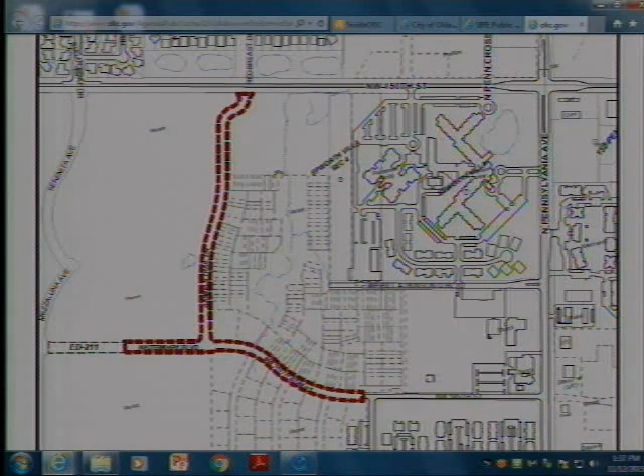Chair would entertain a motion. Move approval. Got a motion and a second to approve item number 5. All those in favor? Thank you. Record show all voted aye.

Item 6 was deferred. Item 7 is SPUD 851, to rezone 4401 Southeast 118th Street from C3 and AA to SPUD 851.

Yes, sir. State your name and address, please. Kerry Vogt, my address is 2509 Southeast 93rd Street, Oklahoma City.

If you remember, at the last Planning Commission meeting, I asked this gentleman to make some attempt to do elevations and so on and so forth. He has sent pictures. I have talked to him two or three times, a couple of times on the telephone. I have no problem with what he's trying to do there, so I'm satisfied with what he's trying to do.

With that, I move approval of that. Is there anybody else who might want to speak on this matter, or anybody wishing to protest?

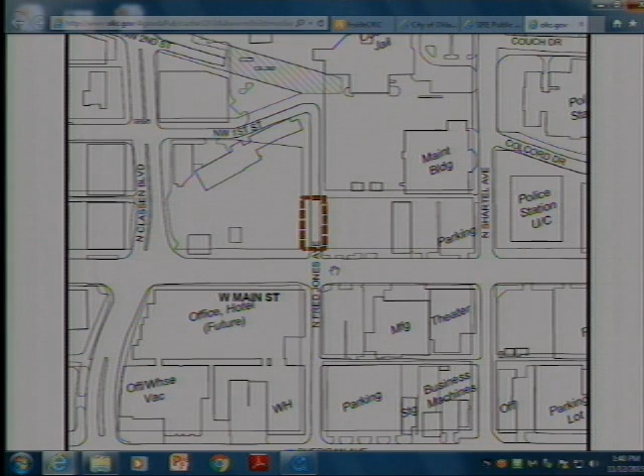Cindy, do you have some of these pictures? I do. Go ahead. I'm sorry, Ms. Powers - is the approval you're asking for subject to approval by the board of that curb cut?

Sure, so it's going to work itself out because we still have to go to council and the Board of Adjustment. The Board of Adjustment will be heard in December for the curb cut.

The only question I have is about conditional approval. If we do, why can't our approval be conditioned upon the Board of Adjustment approving what it is they want to do? You'd have to ask your legal staff - I don't know if you can condition a closing. Dan, can we do a conditional approval?

Sure, that's what I'd prefer, rather than - because if you have every optimistic idea that you're going to get approved, I wouldn't like for us to say yes and then something happens. So I would modify my motion to a conditional approval of this application, conditioned upon the Board of Adjustment approving the application to provide what Young Brothers needs. Fair enough. I'm hopeful that the Board of Adjustment will be very receptive to our application.

I have nobody signed up in protest for that item. Got a motion and a second on item number 8. All voted aye. Thank you.

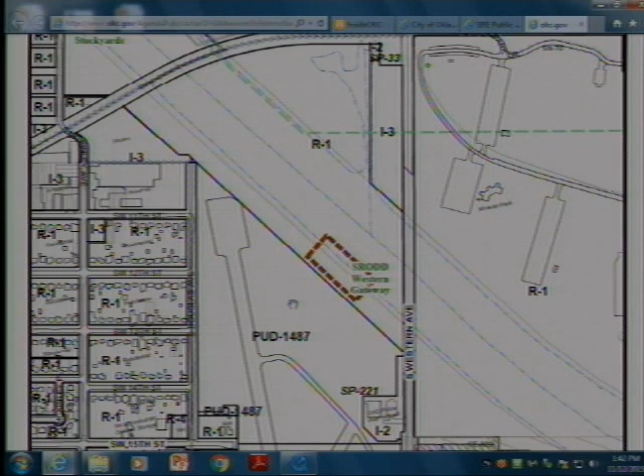We do have a video of a model very similar of what this Ferris wheel will be, and I want the Commission to be able to see the light show that we're discussing. How long is the video? About 35 seconds, like 10 seconds.

I would like Blair to come up and address the commission, just to give them an update on the overall project.

Absolutely, Blair Humphreys, 1222 Northwest 20th. Honored to be before you. I think last time I was here we were providing an update and progress presentation on Wheeler District. We're still actively working away. The Ferris wheel is still the thing first on the drawing board to get developed.

Development is a humbling process, so everything is taking a little longer and costing a little more than I initially anticipated, but we're still very much committed to fulfilling the vision of the Wheeler District Master Plan that was put together by the citizens through our charrette process a little over a year ago. The Ferris wheel will serve as a gateway not just to the project and along the river, but also to the entire Southwestern Avenue corridor and hopefully to the south side, and really become another part of the iconic mix of elements in and around downtown and throughout Oklahoma City.

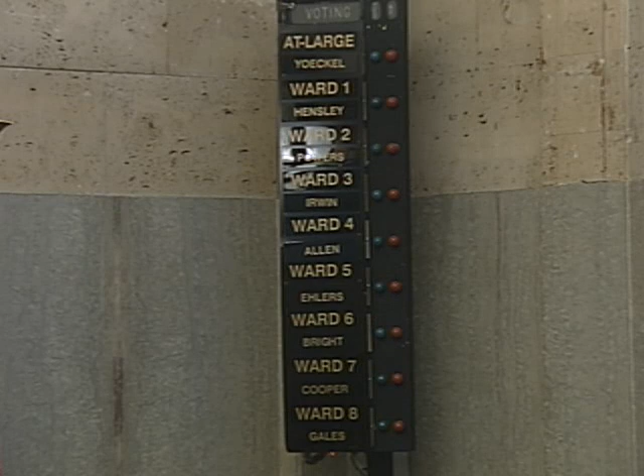With all the conditions cited in the staff report, are you agreeable to all of those? The ones from the Scenic River, we obviously keep the Scenic River designation on. Yes. So my only comment is, as long as the design meets with these conditions, the design elements that are in this had to get specific design approval through the Scenic River Design Commission. So, yes, qualified that as long as what you see is permitted under the SPUD. Okay, so long as we're not agreeing to anything not permitted.

Got a motion and a second, and all voted aye. Thank you.

Got two protests on this one. Item number 10 is SPUD 856 to rezone 7 South Mickey Mantle Drive from BC, DP, and FP to SPUD 856.

For the applicant, can I have your name and address, please? Victor McAllister, B&T Engineering, 2833 Southwest 119th, on behalf of Verizon Wireless.

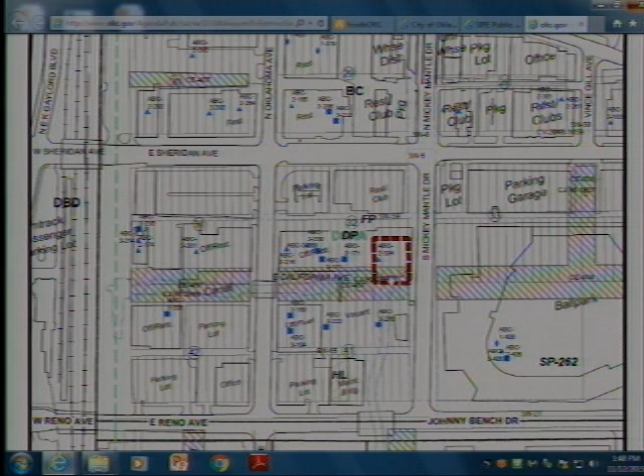Can you give us an idea of what you're doing? Basically, we've been working with staff, and per Planning Commission direction, we went to Bricktown this morning for committee and got approval there. Basically, all we're doing is adding some small 12-inch by 12-inch antennas onto the JDM Place building. There are currently similar antennas already in place, so we're going to paint to match for all direction.

Did the Bricktown Design Review Committee look at this? Yes, they did, and they approved it this morning.

Any other comments or questions from the commissioner? When are we going to know if these things work? This is a different applicant than the previous one that came through for Verizon with a different type of technology. This one is more mainstream wireless. So our intent is to hopefully have this on air in conjunction with the entire network, hopefully by third quarter next year.

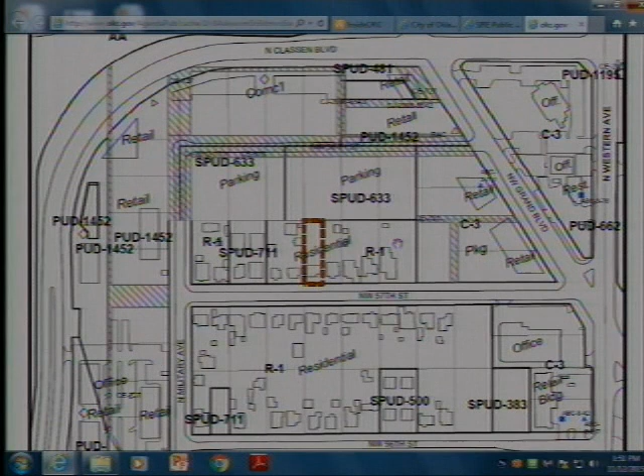The only question I really had about this application had to do with your side yards, your separation. The properties to the west of this all have two-story structures of one kind or another behind the main structure, and it backs up to a parking lot. So I don't have any objections to this.

Is there anybody who wants to be heard on this matter? If not, I'll move for approval. Second.

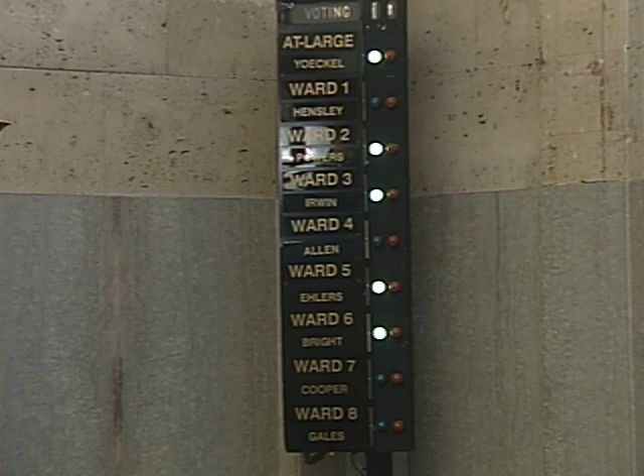Do we have anybody in the audience wishing to speak in protest? I have nobody signed up. Let the record show all voted aye. Thank you.

Item number 12 is SPUD 858, to rezone 15505 North Penn from R1 to SPUD 858.

Hello, my name is Steve Landes with Landron Group, or Landron Engineering, on behalf of the owner and the developer on this project. My address is 209 West 9th, Shawnee, Oklahoma.

Once again, my name is Steve Landes.

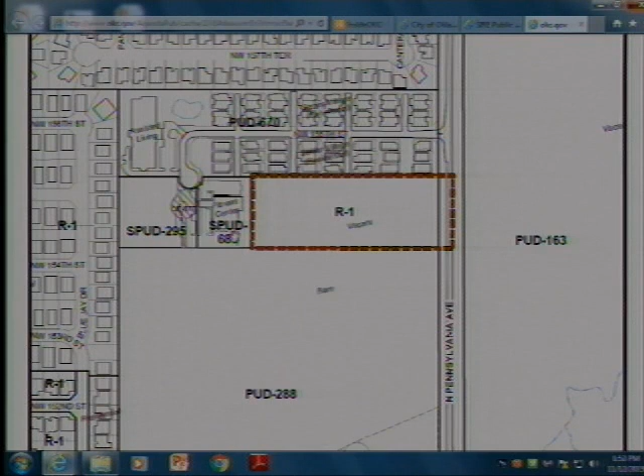What we're actually looking at doing here is a combined mixed-use PUD. The front area would actually be an O2, or O1 excuse me, type office complex, more of a residential type development. The back area will have primarily climate-controlled mini storages, some of the smaller units really more designed for the neighborhood areas around there.

Realistically, we put the thing together, thought everything looked like it was in pretty good shape, worked with city staff on this one, and felt we were in pretty good condition. The only thing that happened, we got a few protest letters.

The primary protest letters we first saw were basically tied to the property to the south of us, owned by a company named 150th and Penn, a large development property looking at a 40-acre development of combined uses, including mini storages, office complexes, shopping centers, and a wide range of uses. That group actually put together a little effort to contact all the neighborhood associations around there, and I put some of that information in your packet.

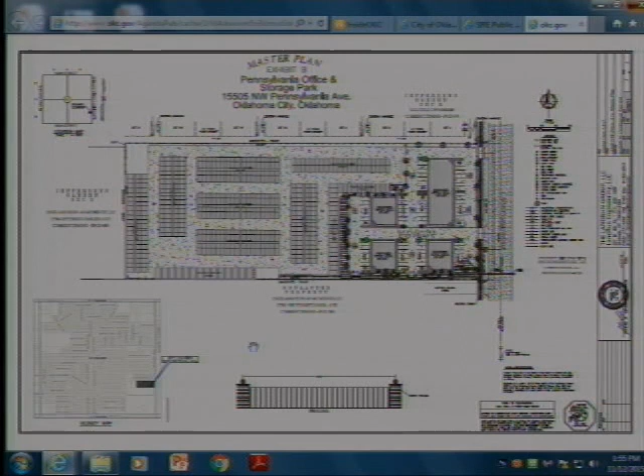Since that time, we got the protest. We actually tried to speak with all of the different neighborhood associations. The main one we talked to was to the north of us, the residents of Jefferson Gardens. Yesterday we met with the HOA and spoke with all of them regarding what our development was all about, and tried to negotiate with them to put things together. Most of the next two rows over here are actually with that group, and I think they're here to speak in favor of our project.

Let them speak on their own behalf on that aspect of it. What we've looked at trying to do is make sure we have good separation between the two, make sure the hours are good, and we have a good type of facility for that.

We did try to contact all the other protesters. The group to the south of us originally weren't that interested in speaking. At 8 o'clock last night, I was informed they would be happy to talk to us next week sometime. So they had looked about deferring it but would really rather not defer it if possible. I think the primary reasoning behind some of their protest, or that group's disinterest, is that one of the primary clients within that new development is Switzer's Locker Rooms, which is in competition with our facility as much as anything else, along with an office complex that's in competition.

I don't really see that opposition associated with competition as the direction this board should take, but we would still be happy to meet with them this next week to see if there are any ways we can go ahead and resolve any issues they might have and clarify things.

Have you seen the conditions? Do you agree with those conditions? We don't have any problem with any of those conditions, sir. Okay.

Commissioners? I do have one, yes. Okay, you want to listen to the protester, Mr. Sean Rieger?

Thank you, Mr. Chairman. Sean Rieger, representing the property owner to the south at 136 Thompson Drive. I'll be very brief. Our concern mainly is the buffering at the edge. The gentleman suggested they just contacted us last night. Apparently they tried to contact a different attorney for this owner, and the message didn't get through to me until yesterday, and this morning I was with you in another meeting, so I was not able to meet with them before this meeting. We very much would appreciate if the item was postponed so we could discuss with them the buffering along the edge.

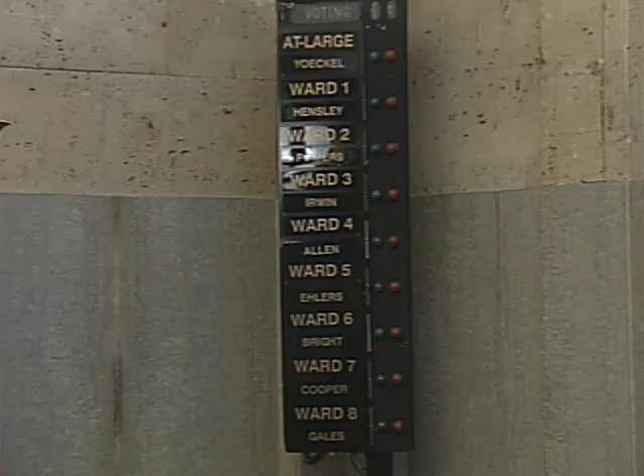May we continue this to the next meeting, which is December 10th? Got a motion and a second to continue item number 12. All those in favor? Thank you. Record shows all voted aye.

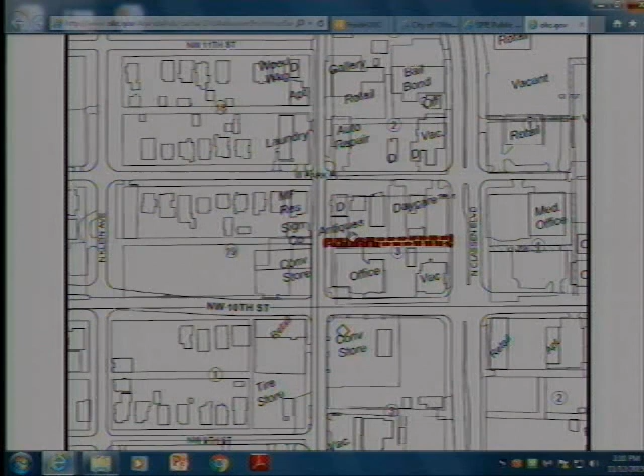Item number 13 is CE 925, to close a 15-foot east-west alley located at 1113 North Classen Boulevard. Mr. Chairman, David Box, here on behalf of the applicants along with Keith Gibson. Our clients have purchased all the properties except for the daycare, which has access off West Park Place. Unlike the closing you saw at the last meeting, south of 10th Street, we don't think this would have any negative impact on access. They are going to develop the entire property, except for the daycare facility they don't own.

Staff has looked at it, they have no objection, and we'd ask your support. Commissioners? Nobody signed up? Move approval. Motion and a second to approve item 13. All those in favor? Record shows all voted aye. Thank you very much.

Item 14 is C6771, the final plat of the Grove Phase 10, located west of May Avenue and north of Northwest 178th Street.

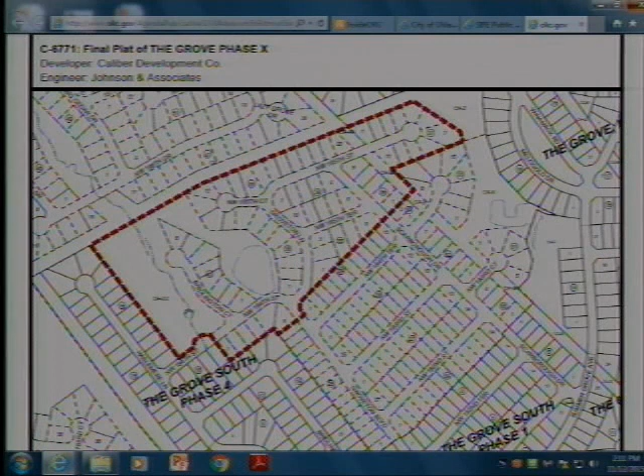Tim Johnson with Johnson & Associates here on behalf of the applicant. We've reviewed the TEs and we agree with all of them. We'd ask for your approval.

Commissioners, I have nobody signed up. Move approval. Got a motion and a second to approve item 14. Record show all voted aye. Thank you.

Item 15 is C6769, the revised preliminary plat of the Brook, located north of Northwest Expressway and west of Piedmont Road.

Again, Tim Johnson on behalf of the applicant. As described, this is a piece of property that had a preliminary plat on it before, and we have resubmitted this with a little bit of a different design.

It has limited access off of Northwest Highway, so for the first limited number of sections, it'll have that single access, which is Boulevard off of Northwest Highway. But there is an easement already recorded up at the northeast corner that takes you back out to the east, Piedmont Road.

I received a copy of a letter this morning from the staff. I think you all have received that. Some concerned neighbors to our east, primarily regarding flooding.

We've looked into that, and the existing culvert under Piedmont Road is undersized and needs to be addressed. And I think as part of our final design, obviously this is just a preliminary plat, but...

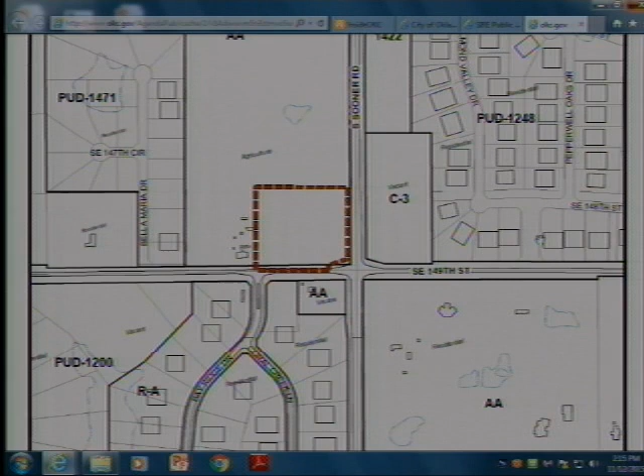I need your name and address, please. My name is Ghulam Sarkar, and this is the address. Sorry, it is 5441 Southeast 149th Street. Okay, is that your residential address? No, sir.

It's 1151 Marbella Drive, Oklahoma City. Okay, tell us what you plan on doing. We're planning on building a convenience store and gas station.

Do you agree with the technical evaluations in the staff report? I'm sorry, sir? There's a list on page 10 of the technical evaluations, the conditional approval of the staff, and there are a list of six requirements.

...that the staff is requesting before we approve this application. Have you read the TEs?

Yes, sir. Do you agree with all of them? Yes, sir. That's no EMD signs, 8-foot tall signs, 5-foot sidewalks on Southeast 149th Street, a traffic impact analysis.

You agree with all those? Yes. Okay.

Okay, I've got one protester, Joseph Glenn. I'm not a protester. Oh, okay, thank you, sir. So I have nobody signed up in protest.

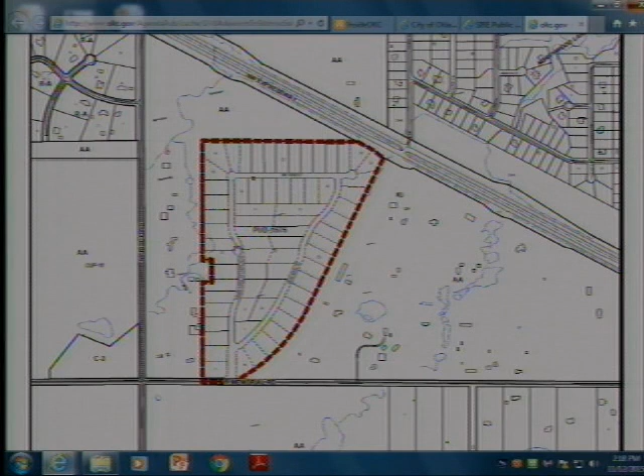Okay. I'm sorry. Nobody?

Sorry for the delay. We're kind of short-handed today.

Okay, go ahead. If you guys have any particular questions, I'd be happy to answer them. Commissioners, questions?

Yeah, there's one letter is all. Is there anybody in the audience wishing to speak in protest?

Just the letter's all. I have a question about the letter and the statement that you've been dumping dirt, doing dirt work on this particular piece of property without having any approval at all. Is that right?

I'll start here at the bottom in Tract 3. Initially, the road wasn't up against the homes like this. Initially, the road was further up here so that you would have backyards abutting backyards. The folks on the south asked, could we change that road and push it up against us? We used to look out on a golf course, we don't want to look out onto someone's stockade fence or a backyard. Their preference was to put the road there so that we're looking out onto people's front yards. We did that, we modified it, so that's why that reflects that.

Next in Tract 2, what you see now is a layout similar to the Muirfield Village, the Edinburgh - those developments the commission is now becoming keenly aware of. It's a very successful product for people looking to downsize and for empty nesters.

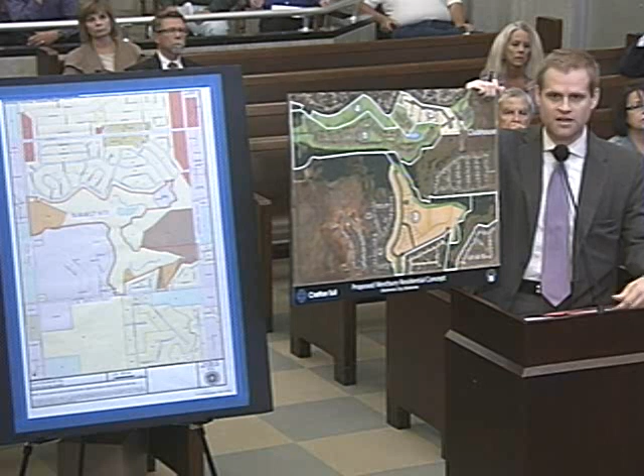Initially, it didn't look like this though. We had the road that went through the middle, with houses on both sides of it. So there was a request that we put the road up against them on the south - can you try to do that here? We accommodated that, and what you see now is a result of that. We pushed the road up, and now we have private drives serving each of those lots. The result was we lost 7 lots.

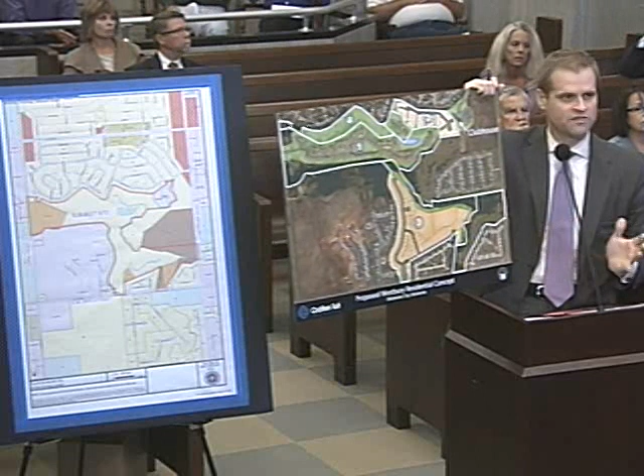Pursuant to R1, we would have had around 57 lots. We're down to 50 now. But what you have is the street up here - this one doesn't do that good of a job.

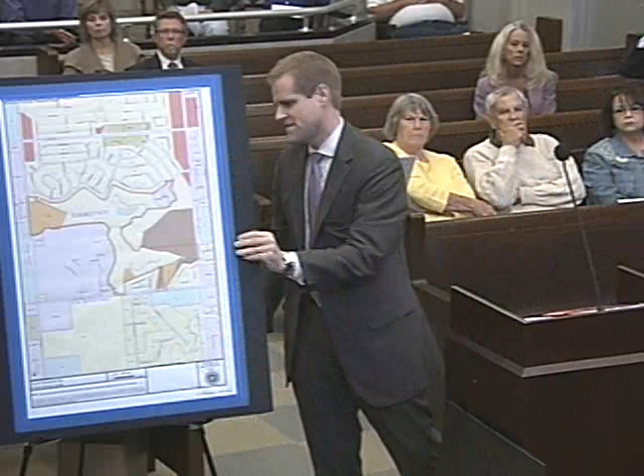Where the trees are, on the other side of the street you'll have a row of trees, so they won't be looking out on the backyard. They'll be looking out over a row of trees, then the street, and you'll be looking into lawns and yards.

Again, it's R1. What we have here is an R1 product, single family. But what we've also done here is attached a requirement that it's all 55 and older, age restricted, because this part, Tract 2, is meant to serve as a component of Tract 1 in the overall development scheme. So when we get to Tract 1, what we have is senior independent living, again age restricted, drafted into the PUD, 55 and older.

But we still sat down and worked through issues with neighbors. What we came up with was the following modifications: only 20% of all the structures in Tract 1 can be more than one story. Additionally, there's a tract outlined in white here, and the entirety of that is required to be single story.

There was a fear of having multiple families in one structure—one family on the first floor, a separate family on the second floor. What we've done is draft language to eliminate that. So any two-story unit would have to be just one family or one living unit that happened to be two-story, not your traditional, typical multifamily type of structure.

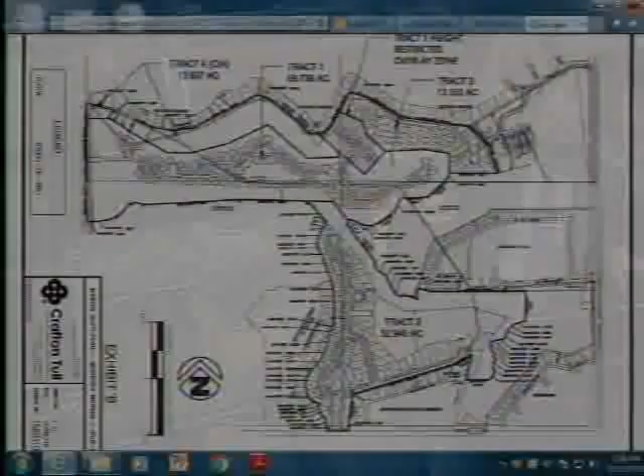We limit the entirety of Tract 1 to only two five-plexes. An additional concern the neighbors had was connectivity between Tract 2 and Tract 1, possibly creating a thoroughfare where, to avoid a certain stoplight, you could come through and weave your way through the neighborhood. So what we've agreed to do is provide no connection between the two. That should satisfy that concern.

Additionally, we agreed to a minimum square footage for homes in Tract 2 of 1,400 square feet. Initially that might sound small, but we have to keep in mind this product is designed for 55 and older—people trying to downsize, to get to a smaller house. With that age restriction, there's not much higher we could go for a minimum. In talking to Commissioner Irwin, we know one of the concerns out there is traffic.

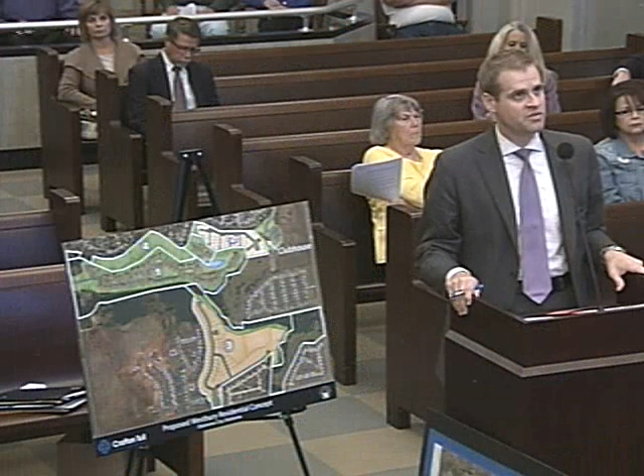So what we've agreed to do is provide a traffic study as part of our platting process. This application didn't meet the threshold required for a TIA, but we have agreed that we will do one as part of our platting process and see what improvements may be warranted based on this development.

Additionally, there are drainage issues throughout this part of Oklahoma City. We spent a lot of time dealing with that. It's important to note that significant effort was spent designing this project so it was out of the floodplain and floodway, and there is very little, if any, of this development that is in the floodplain or floodway. That's one of the policies of the comp plan, and we have adhered to that. There are other developments in close proximity where they've actually had to pull things out of the floodplain to develop—that is not our intention.

Before we can turn a shovel of dirt, the civil engineer is going to have to do a very expensive, very thorough, detailed drainage analysis. That will have to be signed off on by the city, by FEMA, and any other governmental agency that controls drainage in these creeks. So we're confident that there may be some issues.

There may even be some pieces that we can't develop, but whatever this study says, we're going to have to live with that. That, combined with the effort made to stay out of the floodplain, makes us confident that we aren't going to create a problem. We believe it's a tough tract, and you can see how much of the development that my client owns isn't actually going to be developed—a significant amount.

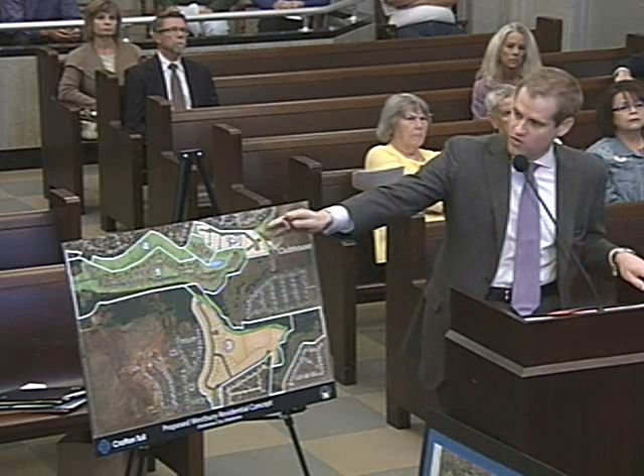Additionally, one of the concerns was what's going to happen north of Tract 1, between the neighborhood and this portion. Well, we didn't have any plans for it, so what we did is revise the PUD and make Tract 4 its own tract within the PUD, limited to community recreation and those types of uses common in neighborhood amenity areas.

What it also does, as you can tell, is provide a significant buffer from any development in our PUD to the neighborhood. It's approximately 150 to 200 feet of buffer that will be kept in its natural state. Maybe there are gazebos or some other type of use, but the way the PUD is written, it's limited to recreational type amenity uses in that area. So with that, we truly believe this is a good infill site.

When we look at development proposals, this commission is faced with sprawl, pushing out the boundaries of where we're developing, extending those sewers and water. When we look at infill developments, one of the goals is to use land that is undeveloped now where we already have city services. Well, that's what we have here. We have all the city services, we have a vacant piece of land, and a development that would fill a need in this market segment for senior independent living. We think it's a plan that will be successful and in harmony with the neighborhood. We'd be happy to answer any questions, and we ask for your approval.

Commissioners, you want to hear from the protesters first?

Let me remind the protesters that we've got three signed up, and we don't want to hear items two or three times. We want to hear new items. And let me remind you, you've got a three-minute time limit, and we'll try to hold you to that pretty much. The first person I've got is Ruth George.

Your name and address, please. I'm Ruth George, and I live at 9920 Thompson Avenue. We back up to the golf course on the north side of it. And as I understand, they're going to build awfully close to our property lines. There are no condos, no apartment buildings anywhere within that area, whether you look south, north, east, or west.

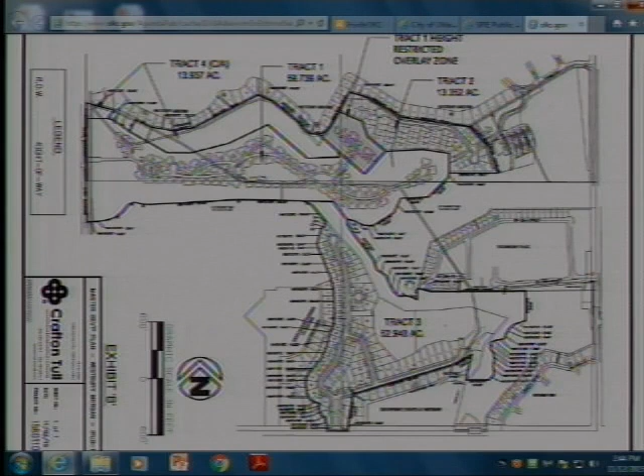All brick, it meets the same architectural standard that this commission has asked for from developers, that being brick homes. But they're age restricted, for people who want to live among other 55 and older, and want the ability to have activities. Ron says he's got a team constantly putting on things like painting parties and movie nights, geared towards making people social, but they don't want to have to own the place where they live.

Buck, is this, or Mr. Irwin, is this what you're... Any other questions? Chair to entertain a motion.

Were you signed up, ma'am? I was. Okay, I was signed up and I deferred, but I need your name again. I'm Mary, sorry, Garrison. 2005 Edinburgh Drive.

There's just a couple of points I want to make. First of all, thanks to the developers for meeting with us and coming to some terms. One of the things we were really concerned about was changing Tract 1 to an R4. Nobody in that neighborhood wants the possibility of apartments. And I know the developer right now says that's not going to happen, but land can be sold, and an R4 goes with the land, I understand. So that was one of our big concerns.

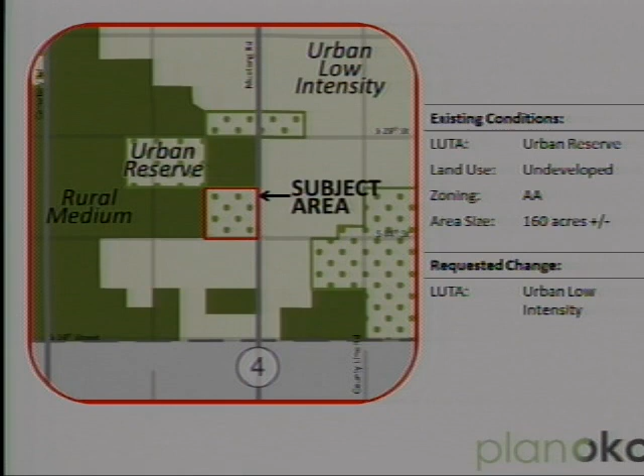The urban reserve layer is meant to hold areas until the area is ready for urbanization, which would allow it to develop at urban densities in the future when an efficient and sustainable delivery of city services is available. The proposed land use is urban low intensity, which is the least intensely developed area of the city, which still receives urban water, sewer, police, park, and fire services.

Why is this area currently urban reserve? There was a need to hold land in the southwest sector to account for future market pressures. It is adjacent to State Highway 4 and other urban low areas that currently have services. Data at the time showed a lack of immediate access to both sewer and water. And quite frankly, this is a borderline site, kind of between the rural area and the current urban area.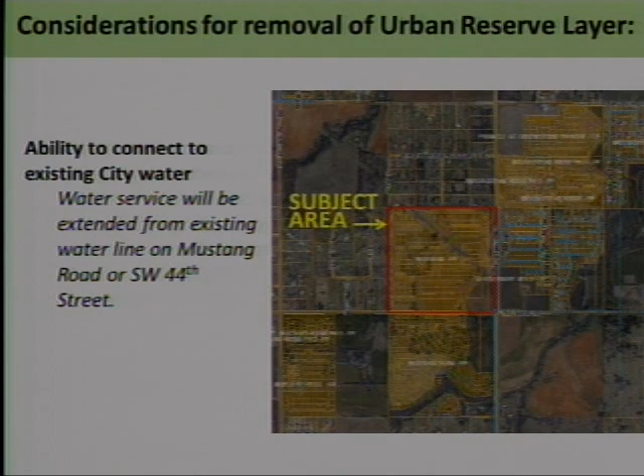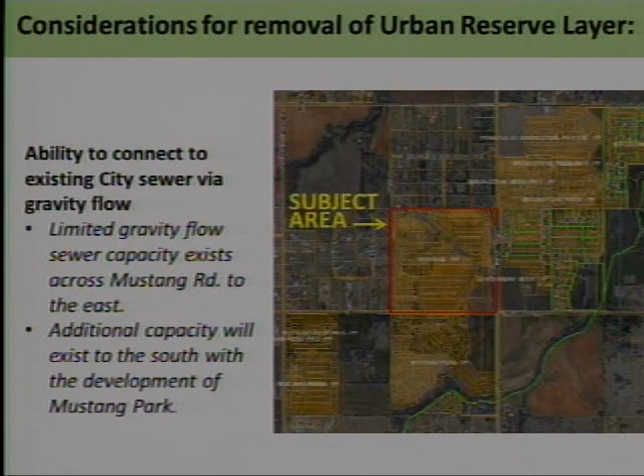We look at the ability to connect to city sewer. There is gravity flow sewer in the area on the east side of this site, and there's additional capacity that could be provided to the south as well that this site could connect to. We also look at fire service in the area, and this area has an urban response time for fire service according to Plan OKC.

As for compatibility with the surrounding area, there is urban low to the south and east, so it's compatible with that. There's rural medium to the north and west. Special consideration should be given as this develops to ensure compatibility with that rural medium, which could be done through increased lot sizes around the edges, larger setbacks, landscaping, and things of that nature.

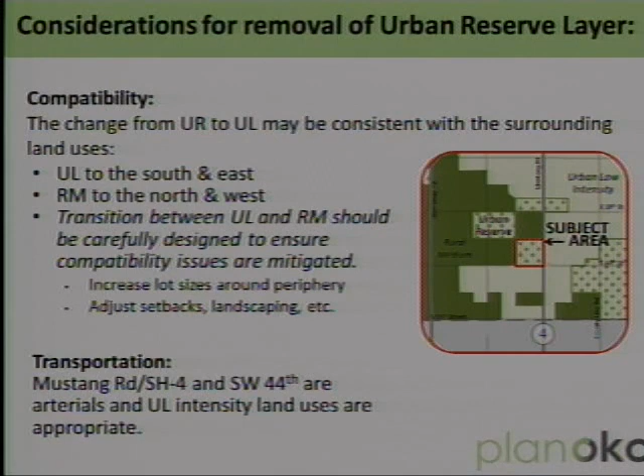As far as the transportation system is concerned, Mustang Road, which is State Highway 4, and Southwest 44th are arterials, and urban low-intensity land uses are appropriate on those arterials. Staff recommends approval, removing the urban reserve layer and designating the area as urban low intensity. I'd be happy to answer any questions.

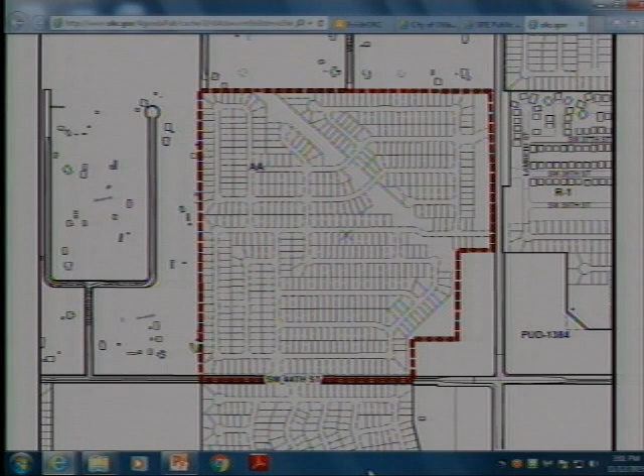If you look at an image of the other corners at this intersection, you'll see similar development patterns on 3 of the 4. To the east, they've got straight R1. To the south, they likewise have straight R1. So now that the urban reserve has been lifted, this application does conform to the comp plan.

We would ask for your approval. Do you agree with the conditions? This one doesn't have any. Good. So we do agree with staff's analysis. We didn't have any TEs. This troubles me, this application.

The way I see the plat laying out the residence, and then this coming up is going to be that commercial portion that's not part of this one, but is part of the whole thing. The new Plan OKC has a connectivity aspect, and this has no connectivity at all from the residential to the commercial. We don't have anything coordinating. There is a TE in the commercial PUD asking for that, and we do agree to that TE through the commercial PUD, so that'll take care of it.

So what you'll have to do is redraw some of this on the preliminary plat, correct? Because we do agree with that, we will revise the plat to show the connectivity desired by the plan.

That's great. That's exactly what I think each one of these applications with residential and commercial should comply with what the new plan says.

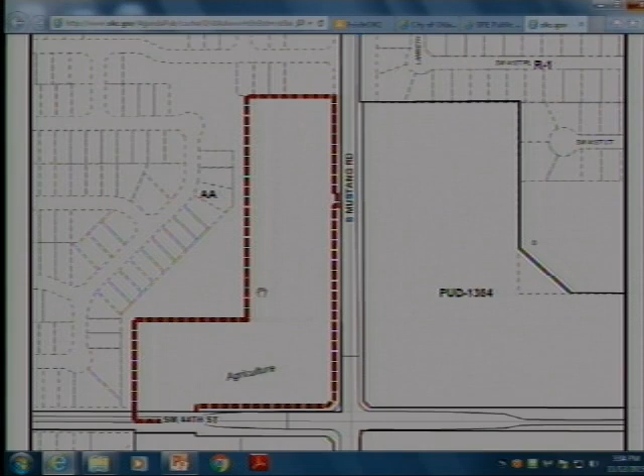On TE 6, we agree with the traffic signal, except I'd like to qualify it so that, in keeping with our discussion this morning, if at the time we develop this impact fees are in place and we are paying those fees, we agree to pay the impact fees and not be double dinged by also installing the traffic light. So if we develop prior to the impact fees being online, we agree to install the signal. If the impact fees are in place, we would ask that we just pay the impact fees as all other developments coming forward.

I'm not sure how that would work - it's one or the other. But what the TE says is that you've got a traffic problem, and there needs to be a traffic signal. I would like to see a more affirmative yes to that TE, because this is going to be a problem already. We already know it.

Here's one. Oh, go ahead. I'm sorry, that's my... okay.

I won't vote for this if you have EMD signs. I just won't do it. But I will give you the 15, 12, and 8-foot signs, that's okay. I think you've got a really significant amount of stuff going up and down the street, but there's no reason to have flashing signs at all. We can agree to take out EMD. Okay, now here's all we're saying on the traffic.

If we go develop it now, there is a problem, and we will address that. Our fear is if we do not develop here in the short term, but wait several years, if those impact fees are already in place, they're going to be collecting money designed to do exactly what we'd agree to do here.

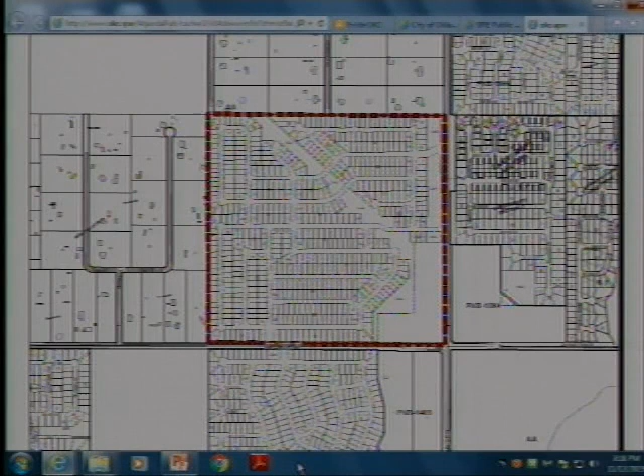I'm sorry? I believe that was in the commercial. It's TE number 5 in the commercial PUD. It says the site plan and PUD documents shall be revised to provide vehicular and pedestrian interconnection. Yeah, add that to this. It's in the commercial. It was a TE we agreed to in the commercial PUD, so it's in place.

I think Randy mentioned a minute ago in his presentation the concept of, I don't remember exactly what it said, Randy, but a buffering between the more dense and the neighbors that are already there. Yes, the comp plan calls for being compatible with your surrounding uses. So in the case of this style of residential next to the larger lot, rural style residential, the comp plan calls for some sort of step down or buffering.

So are there any standards for that or guidelines? The comp plan recommends being 40% of the rural lot size, which I think are 5 acres, so that would make it 2-acre lots alongside those, or creating some other sort of buffer or barrier that would protect those.

We talked about this in concept. What would you guys be willing to do there?

I think what we would be willing to do is, even though it's agricultural, the zoning ordinance doesn't apply. However, there is an ordinance that when you abut adjacent lots, you'd go up 75% up to 7,500 square feet. So we will agree that all the lots that abut the AA will be a minimum of 7,500 square feet.

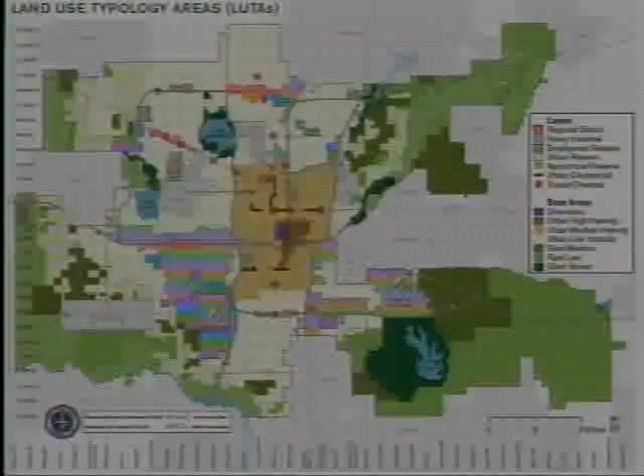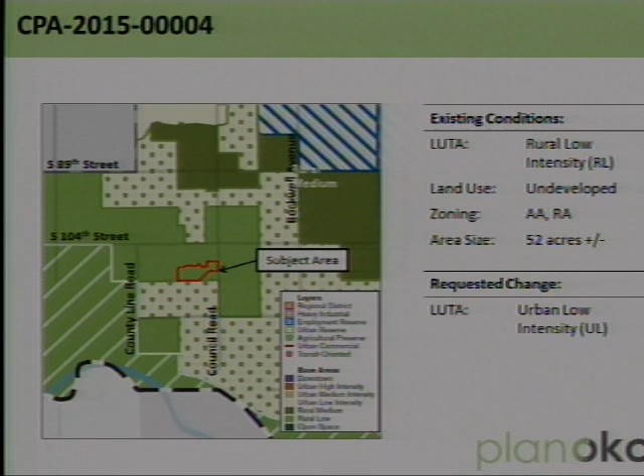Rural low intensity is intended to preserve large lot neighborhoods and residential acreages, intended to remain there with no expectation of receiving city services and no expectation of urbanization in the future. The proposed land use is the least intensive land use that is still urban in nature, intended to have access to all city services: water, sewer, police, fire, and park.

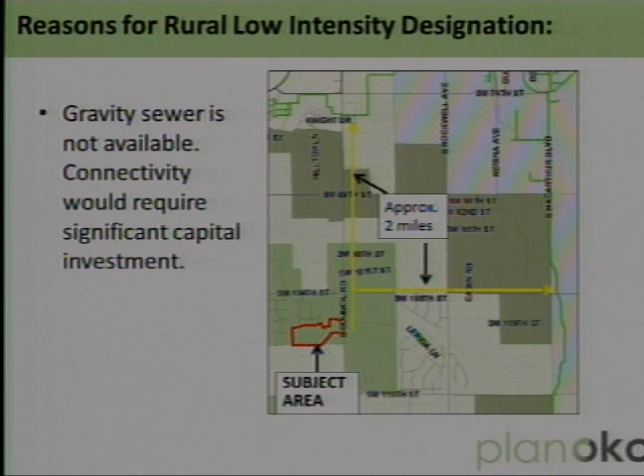The reasons it was designated rural low: gravity sewer is not available. Connectivity would require connecting almost 2 miles to the nearest sewer line. Much of the surrounding area is already developed in 5-acre parcels, which is more of the rural style of development.

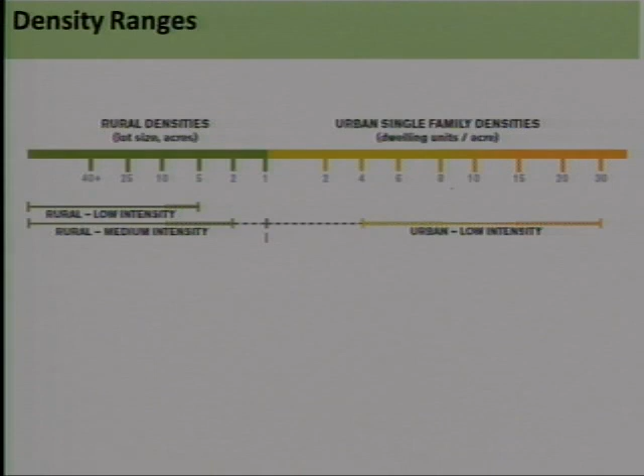When looking at the density ranges, rural low intensity is meant to have a minimum lot size of 5 acres, with a typical lot size from 5 to 10 acres, which is what you see a lot out there. The proposed density would put it more in the 4 to 6 units per acre range.

So when considering whether to change the designation to urban low, we looked at the ability to connect to existing water and gravity sewer. Water is accessible due to the RA development directly north of here. Sewer is not, as we discussed earlier. Private septic systems are being proposed with the development.

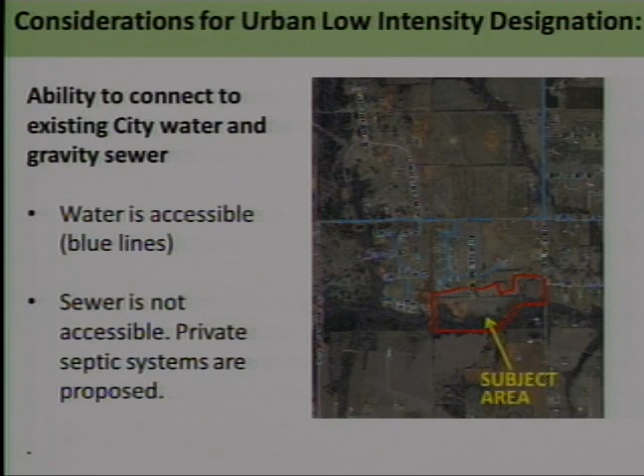Another consideration is that it should be contiguous with other urbanized areas. It is not, it's mostly surrounded by rural low land use typology. There is some urban reserve directly south of it, but it's not currently ready to be served. North is rural low, east is rural low, south is urban reserve, and directly west is rural medium.

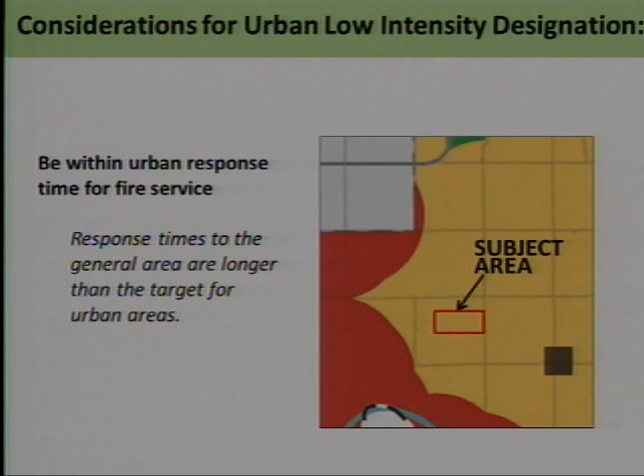It also should be within the urban response time for fire service to be designated urban low. The response times here are generally longer than for the urban areas. It's in the orange, as opposed to the green, which we would like to see.

For the transportation system, South Council Road is a 2-lane rural minor arterial without curb and gutter. It's substandard for urban use, meant to serve low-density areas, and as most roads out there are a 2-lane section line road.

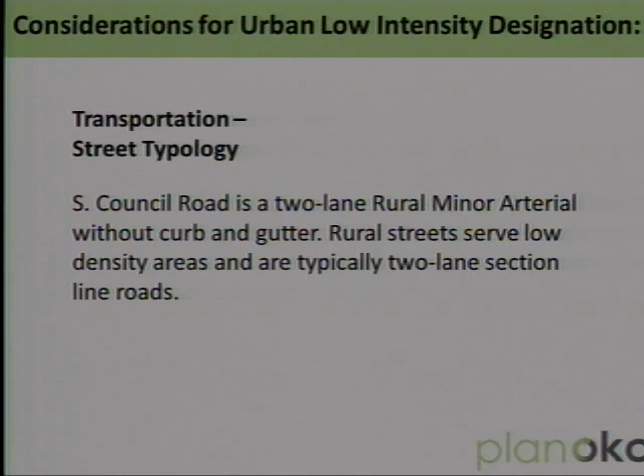Because of those considerations, we didn't feel it was ready to be designated as urban, so we were recommended to deny the request amending the comprehensive plan. Happy to answer any questions.

Well, I just have a comment, Randy. I appreciate your presentation on any of these applications that come in for an amendment to the plan. The first application you presented, you approved of it, the department would approve that amendment. The next one we're going to hear, staff is also recommending approval of an amendment just because of the considerations. This one doesn't fit. I think that if we do anything, it's preserve what we did with Plan OKC and stay with it, to the extent that it doesn't comply with those areas that we really want to preserve for certain, like rural. So if anybody else has any comments, I would move to deny it.

A motion and a second to deny the application. All those in favor? Record shows all voted aye.

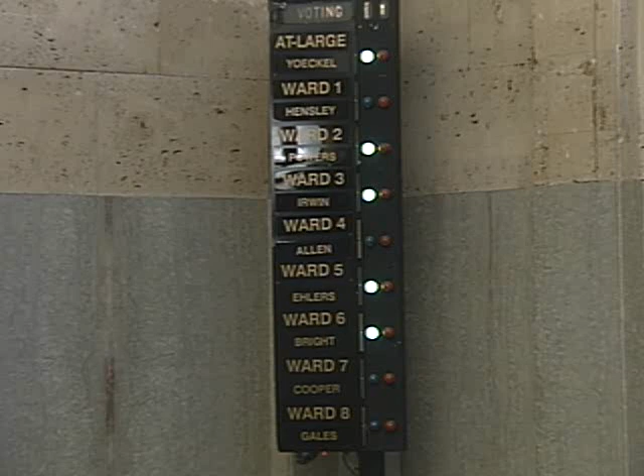What does that do with item number 28? Go ahead. Item number 28 is the companion item for the planned unit development, PUD 1597, to rezone 10925 South Council Road from AA and RA to PUD 1597. Brad Reed with Crafton Tull. This is a companion item with what you just heard.

This area is sort of a strange area. It's able to be served by public water. There is an existing connection into the addition immediately to the north. There's also one at 104th and Council that we'll bring down to our entrance. Current zoning is RA, which allows for a lot size of 30,000 square feet. We're asking for half acre, due to the fact that it can't sewer with ODEQ requirements that require a septic system on at least half an acre.

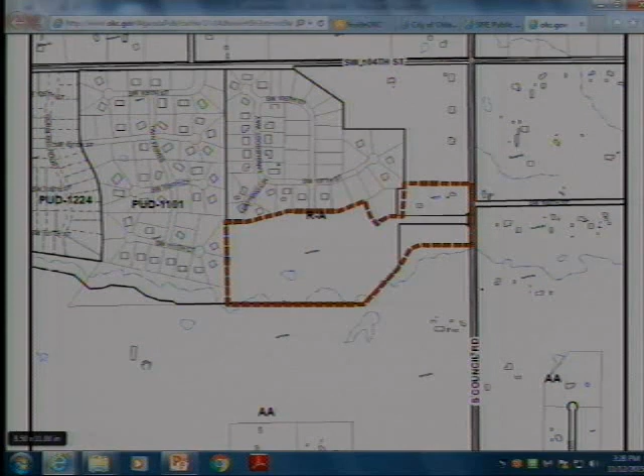As you can see, most of this north section is already zoned as a rural estates type addition. There's a half acre addition in PUD 1224, Southern Preserve Phase 2. We think that this fits in with the land use in the area. If you guys have any questions, I'd be happy to answer them.

So what are the lot sizes in the two neighborhoods that abut this? Immediately to the north is 1 acre. Immediately to the west is 1 acre, but Southern Preserve Section 2, immediately west of them, is half acre.

We got one lady that would like to speak, Debbie Brandt. Need your name and address, please. Good afternoon, my name is Debbie Brandt. Address is 8500 Southwest 111th Court, which is the property just west of the area that they're looking to rezone.

My husband and I purchased this lot less than 3 months ago, on August 24th, and we chose this lot specifically because of the tree line, the wildlife, and the fact that it was very quiet. So you can imagine our disappointment when, after 2 weeks, we received this notice that this area was going to be rezoned. I'm not here necessarily to object, however I speak for our neighbors as well, that we are not excited at all about the half-acre lots. Our acreage is almost 2 acres, to the west, and our neighbors adjoining there are about 1.5 to 2 acres. But we specifically want to request that the tree line remain, not only to protect our privacy, the wildlife, and the level of noise, but also to protect our property values. Thank you.

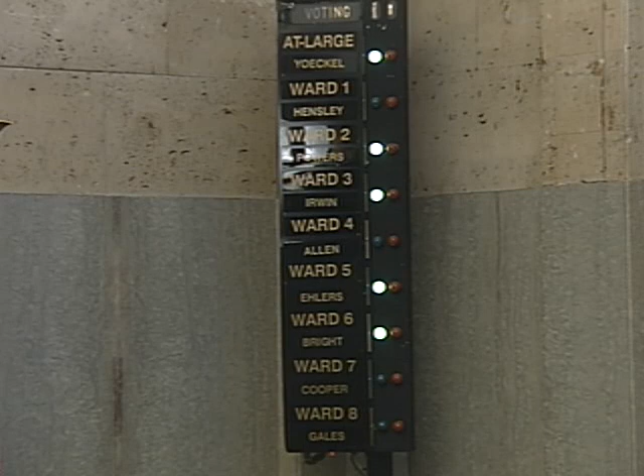Item 29 is CPA 2015-3, to amend the comprehensive plan in an area located east of North Cemetery Road and south of Northwest 10th Street, by changing the designation from urban reserve to urban low intensity. Randy Entz, once again with the Planning Department. The request before you is to amend the comprehensive plan from urban reserve to urban low intensity. It does have an associated rezoning, which you will hear after this.

Once again, we're in the southwest quadrant of the city, close to 10th and Cemetery Road. There's a blow up of the subject site. It's currently urban reserve. Its current land uses around and in that area are commercial, some ag, undeveloped land, and some residential. It's zoned AA, C3, and there's a PUD on it as well. It's roughly 70 acres in size.

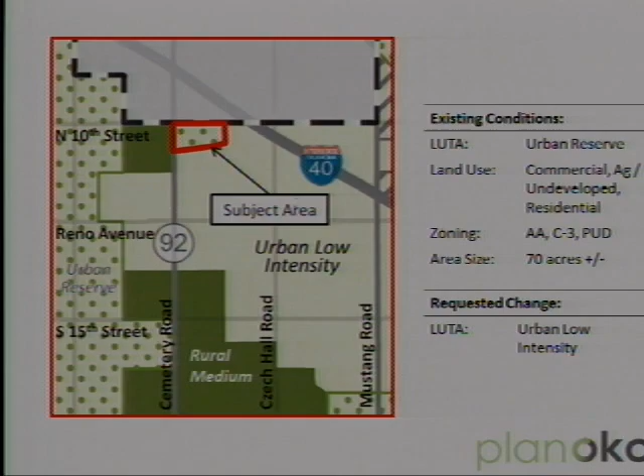The requested LUTA is urban low intensity. As you heard earlier, the intent of the urban reserve is to hold that land until the area is ready for urbanization and keep it ready for developing urban densities in the future when it's efficient and sustainable to deliver city services there. Urban low intensity is the least intensely developed urban area in the city that still receives urban water, sewer, police, park, and fire.

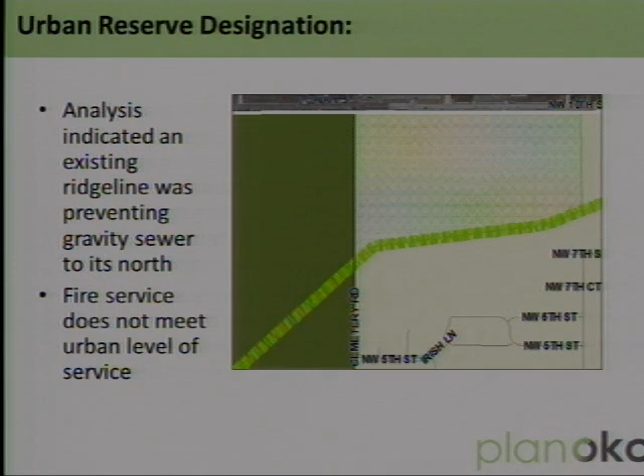Considerations for removing this reserve layer include the ability to connect to the existing city water. There's a 16-inch main along North Cemetery Road and a 12-inch water main along Northwest 10th that can serve the site.

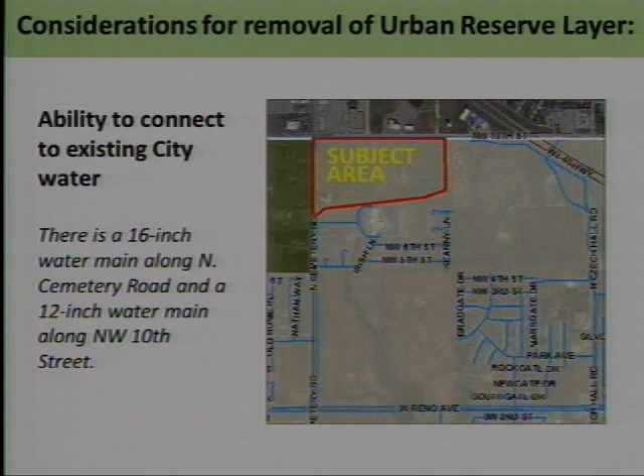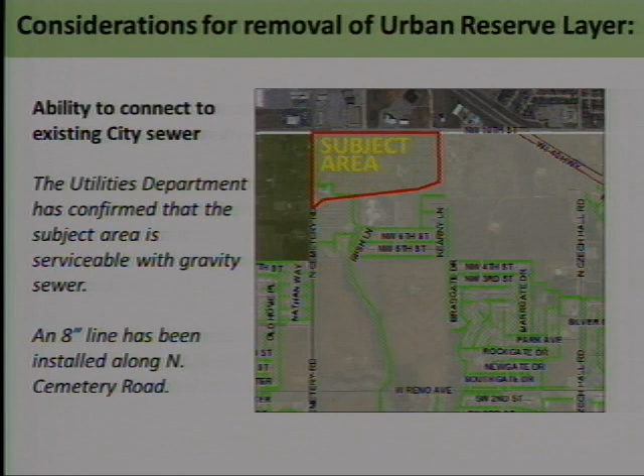As far as connecting to the city sewer, it actually can. We've now determined with new data that it can be served with a gravity flow sewer system. There's an 8-inch line installed along Cemetery Road that it can attach to.

As far as the fire service, it is longer than the response times desired for the urban areas of the plan. It is in the more rural area fire service area.

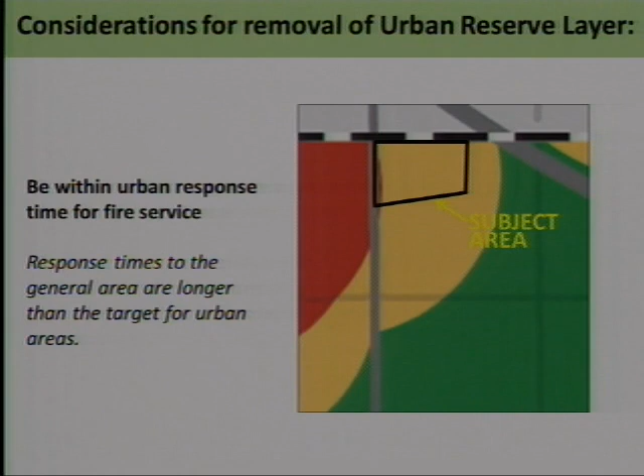As far as compatibility, the urban low intensity is consistent with the surrounding area. North of this site is the city of Yukon and several commercial developments. To the east is urban low intensity and areas being developed as commercial. To the south is urban low intensity, and to the west is rural medium, which are 5-acre lots generally.

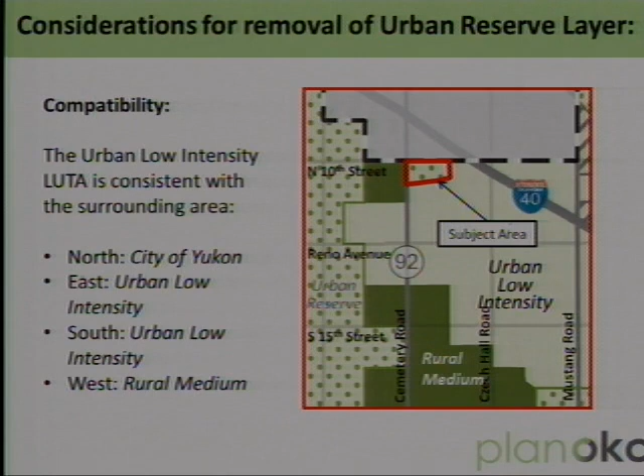The transportation system, Northwest 10th and North Cemetery Road, are both 4-lane major arterials. The intersection is improved and signal controlled, and North Cemetery Road, also known as Garth Brooks Boulevard, is State Highway 92. Both streets are appropriate for the uses associated with the urban low intensity.

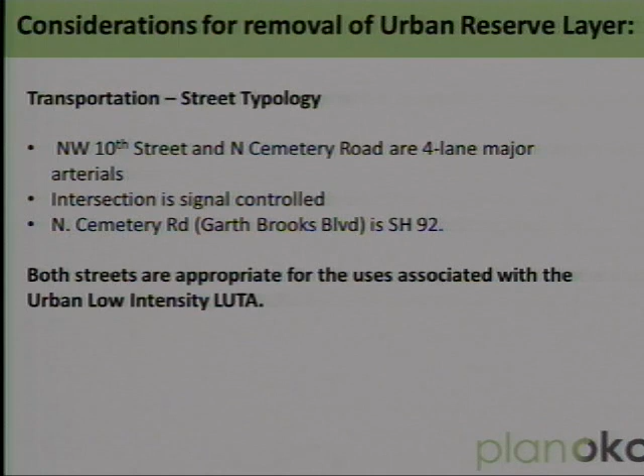The staff recommendation in this area is to approve the request for removing the urban reserve layer, designating the subject as urban low intensity. Happy to answer any questions.

Questions? How is it that this particular application was initiated by staff? Due to the data that changed in the area, we felt that it would have been done with the next update of the plan anyway, and because of the commercial application that was there, we felt it was time to go ahead and look at the area in its entirety.

And item 30 is PC 10432 to rezone 900 North Cemetery. I said item 30, that was item 29. 29. That's okay, I'm sorry. Rezone 900 North Cemetery from AA to C3.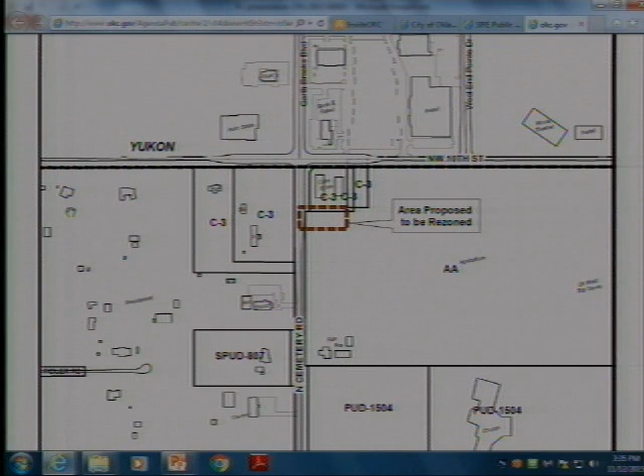Good afternoon. For the last time, David Box, 522 Colcord Drive, here on behalf of the applicant. Again, this is a companion item of what you just heard. If you look at the zoning surrounding this, we are surrounded by C3 to the north, to the west. Just north of 10th Street is obviously that mega retail complex in the city of Yukon. What we propose here is certainly consistent with the surrounding area. Staff does recommend approval, and we would ask for same and be happy to answer any questions.